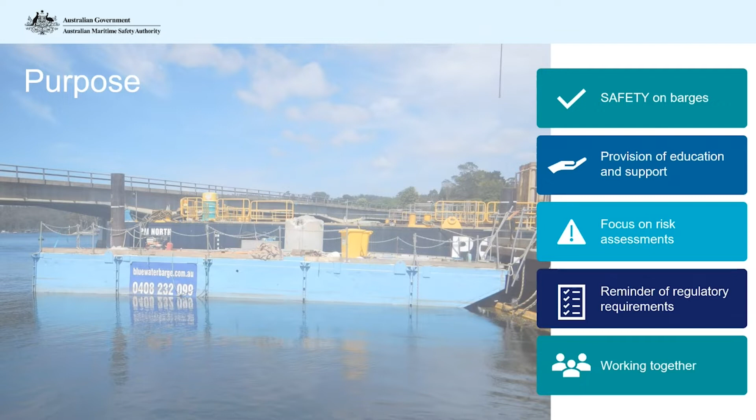AMSA has recorded this webinar after holding a number of successful workshops for construction barge owners and operators as part of a safety education campaign. This webinar aims to improve the safety of smaller construction barge operations. Today, we will educate you about your obligations regarding risk assessments with a focus on the risks associated with operating smaller construction barges. We will take a look at some of the key risks involved with construction barge operations and provide an overview of the regulatory requirements under the national law.

First of all, I would like to provide a brief overview of AMSA, the Australian Maritime Safety Authority. AMSA has a number of regulatory functions and responsibilities. AMSA is responsible for safe shipping in international and Australian waters. AMSA upholds the requirements of international conventions on foreign flagged ships and also conducts flag state inspections on the Australian flagged ships, known as regulated Australian vessels.

AMSA maintains a network of aids to navigation in Australian waters, such as many of the coastal lighthouses. AMSA provides a national search and rescue service utilising both maritime and aviation assets through the Joint Rescue Coordination Centre in Canberra, responsible for an area equivalent to 10% of the Earth's surface. AMSA is also responsible for pollution prevention in the marine environment. AMSA coordinates contingencies in the case of such an environmental emergency, including national stockpiles of oil spill response equipment, and has contracts and arrangements with towage assets in case of vessel breakdown.

And of course, AMSA administers the national law. Prior to the national law, each state and territory had legislation which regulated their commercial vessels. Whilst there was a national committee who developed national standards, these were not adopted consistently across the jurisdictions. This meant that if you wished to operate your barge in another state, you may have needed to get it resurveyed. Also, crew may not have had their certificates of competency recognised in other states.

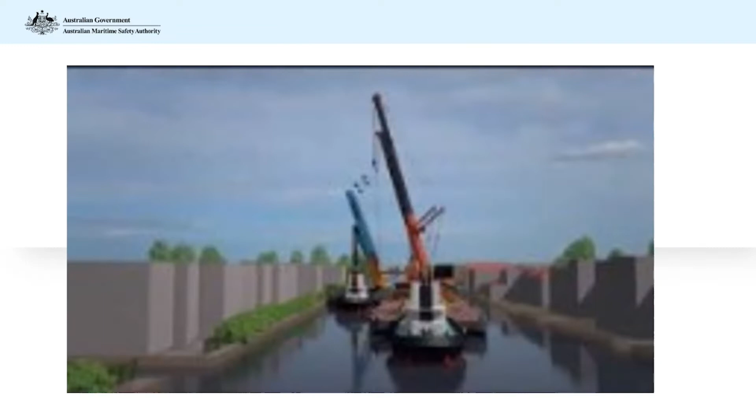Next, we would like to show you a short video which highlights some of the consequences of when things go wrong on construction barges. This is a larger construction barge operation, but the risks are very similar. It happened in the Netherlands in 2015, and I would like to thank Studio Alphen for permission to show this video.

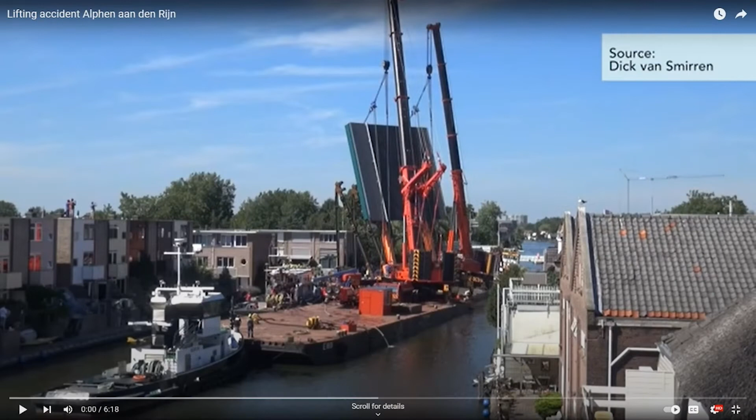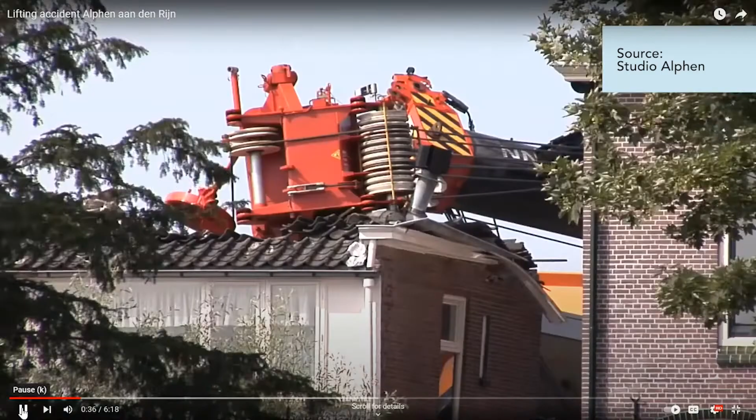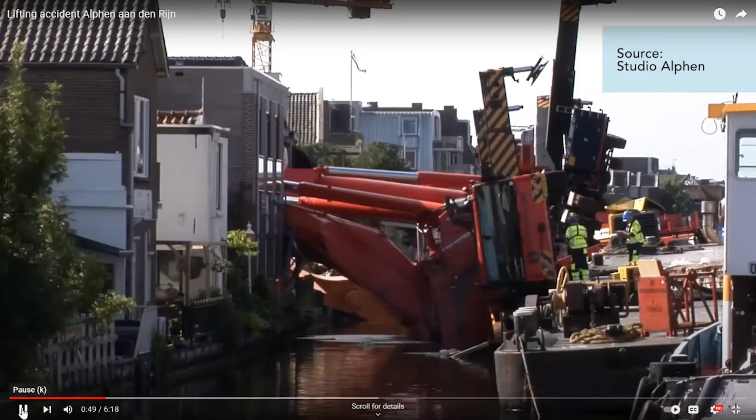On the 3rd of August 2015, a lifting rig of a section of the Queen Juliana Bridge in Alphen aan den Rijn capsized. Both cranes and the lifted bridge section fell on the surrounding buildings. Many were completely destroyed. Miraculously, no persons were injured. Why did the lifting rig collapse? How did the parties involved assess the risks of this complex operation? And how did they manage the safety risks for the surrounding area? The Dutch Safety Board started an investigation into these questions.

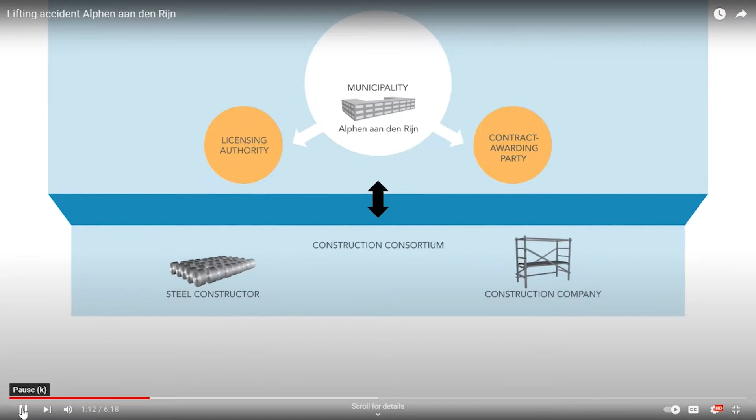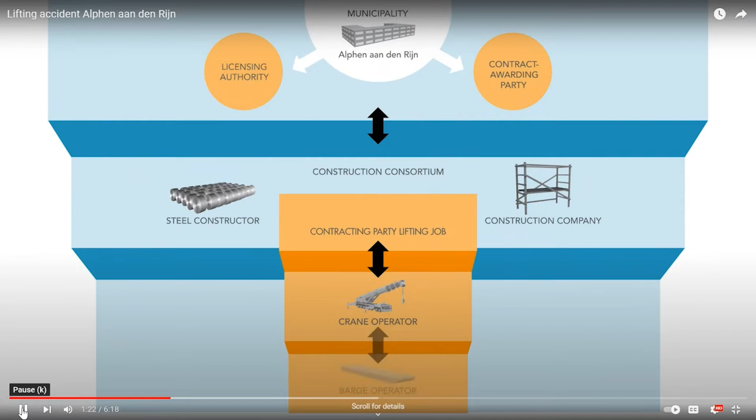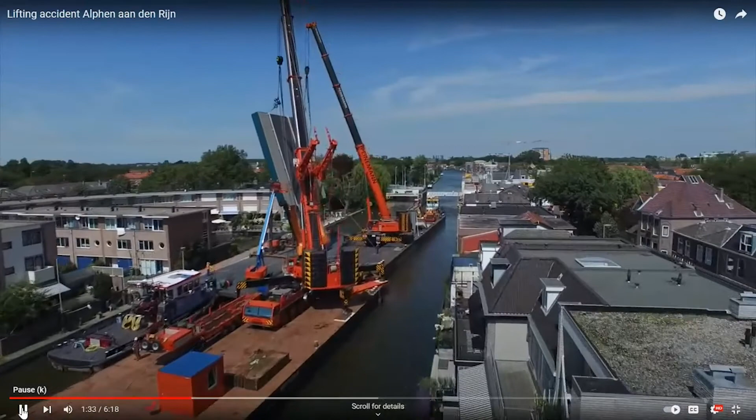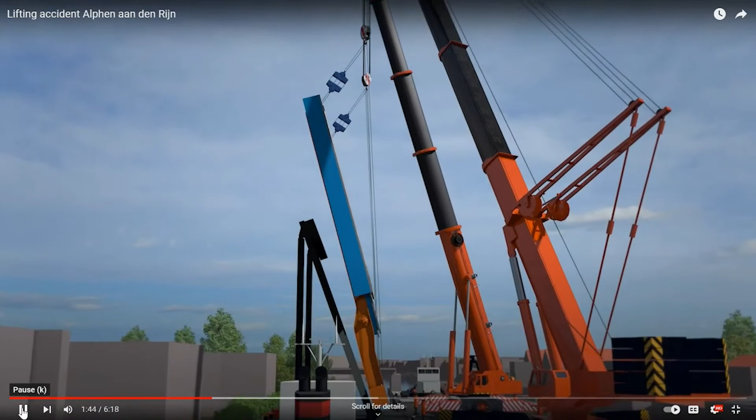The municipality of Alphen aan den Rijn commissioned the renovation of the bridge to a consortium of a steel constructor and a construction company. The steel constructor hired a crane operator to lift the bridge section. The crane operator subsequently hired the barge operator. A large mobile construction crane of 700 tons on the first barge and a small construction crane of 400 tons on a narrower barge were deployed for this lifting operation. The intention was to simultaneously lift the bridge section from a third barge in a tandem lift operation. The bridge section would then be maneuvered in between the two cranes before being tilted into an almost horizontal position. The two barges would then sail 100 meters, where the bridge section was to be raised and fitted into the existing bridge structure.

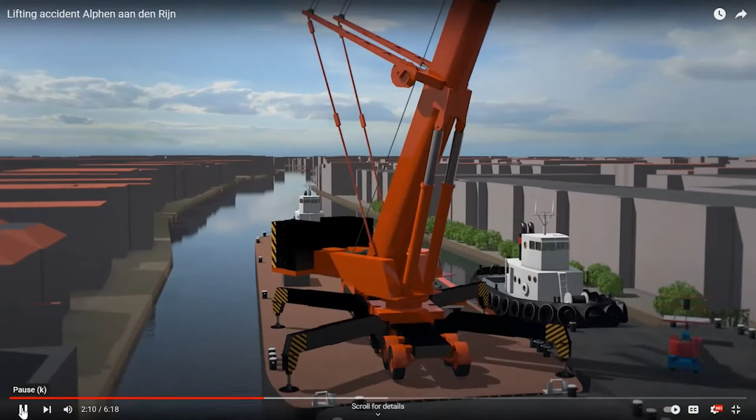The crane operator and barge operator had worked together before, and they believed in the feasibility of the plan, as long as the work was undertaken cautiously and if ballasting of the barges would be done in time.

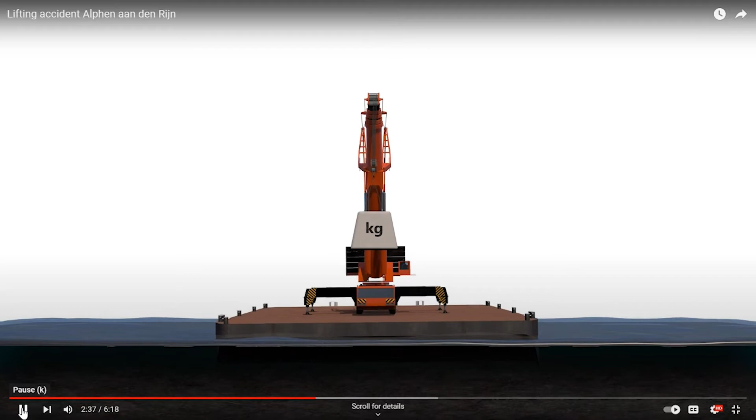Floating objects, such as barges, can move freely in water. The amount of movement depends on the stability of the rig. The more stability, the less movement, and the sooner it returns to its starting position. Stability is determined by the width and depth of the barge, and by the height of the center of gravity in the crane masts.

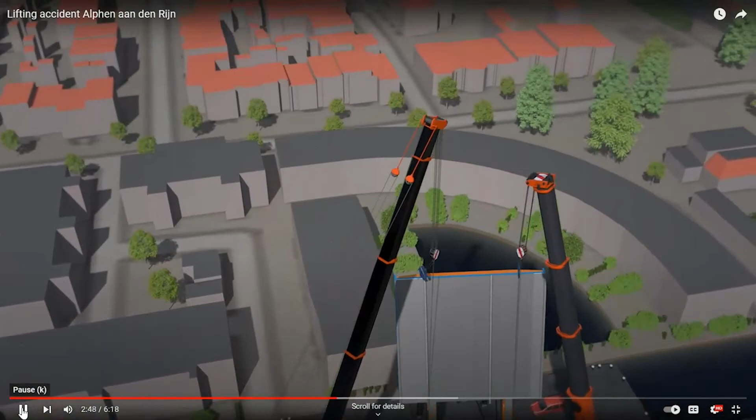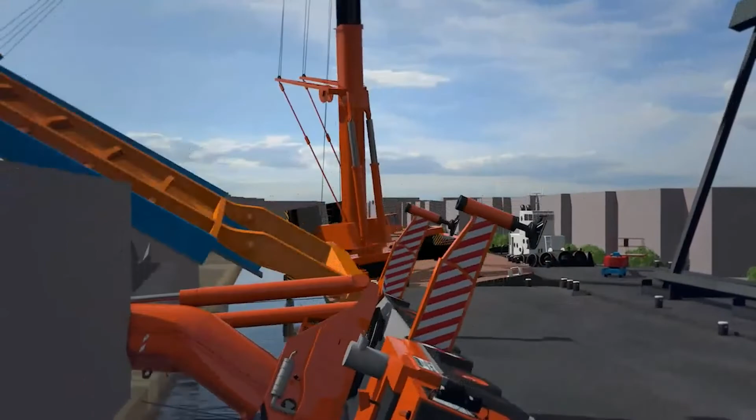The lifting rig as used on the 3rd of August, in particular the barge bearing the small construction crane, demonstrated insufficient stability and started to slope to such an extent that the mast of the crane failed, causing the crane itself to topple, thereby pulling the bridge section with it, which in turn also pulled over the large construction crane.

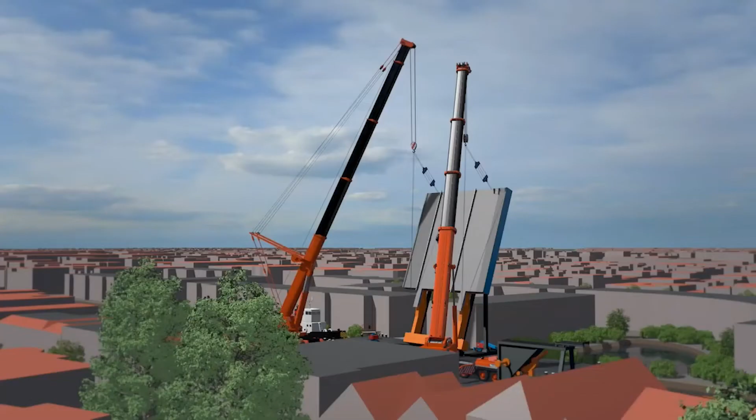The complexity of the lifting operation had been underestimated by the parties concerned. There was a lifting plan that failed on critical elements. The cranes were too high in relation to the width of the barges. In addition, several heavy objects were placed on deck, further reducing the stability.

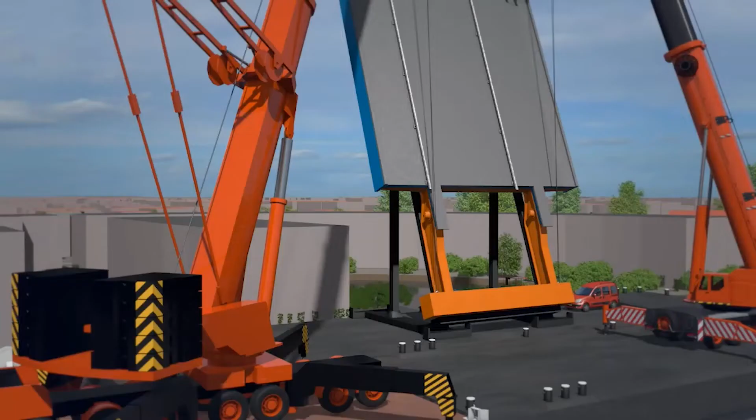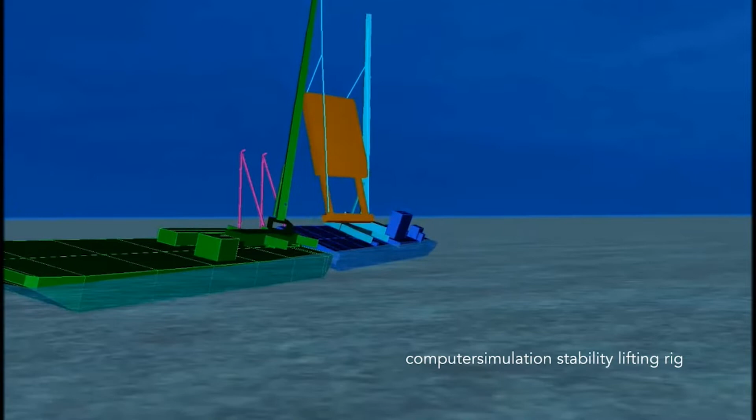There was no margin to absorb additional forces caused, for example, by natural bending of the mast of the crane, the movement of the cranes, or a gust of wind. A relatively small movement of the cranes caused the whole construction to topple. The Dutch Safety Board recalculated the initial stability and concludes that even if the lifting operation had been carried out faultlessly, the accident could not have been avoided.

The lifting rig was situated in the densely populated centre of Alphen aan den Rijn. The largest crane towered with 44 meters far above the surrounding buildings. None of the parties involved recognized that the lifting of the bridge section engendered risks for the immediate surroundings.

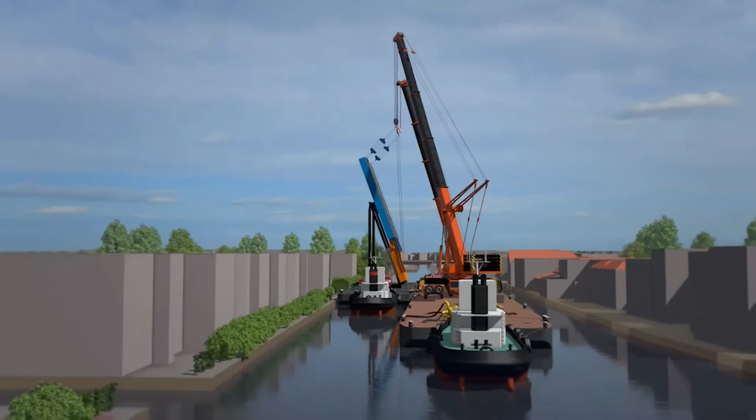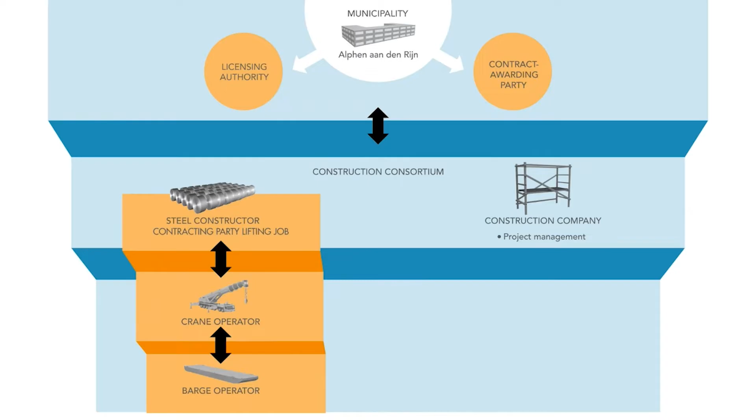Within the construction consortium, the construction company, as project manager, occupied a key role in coordinating risks. However, the construction company saw the hoisting of the bridge section as a responsibility of the steel constructor, and therefore not its own. Neither noticed that the lifting plan was inadequate, and they let the lifting start with an unsafe rig. Safety focused merely on the workers and the construction site itself.

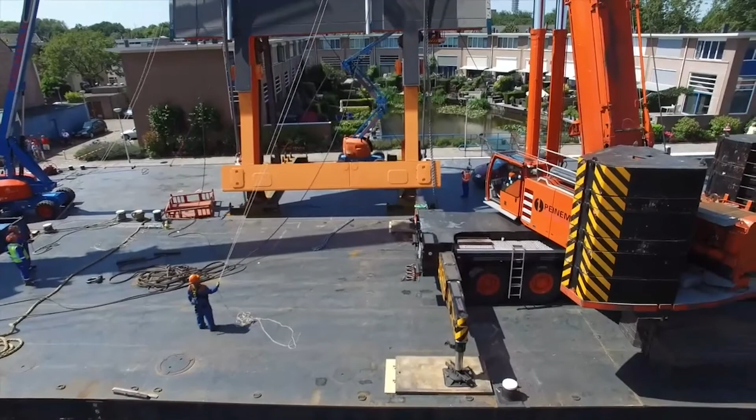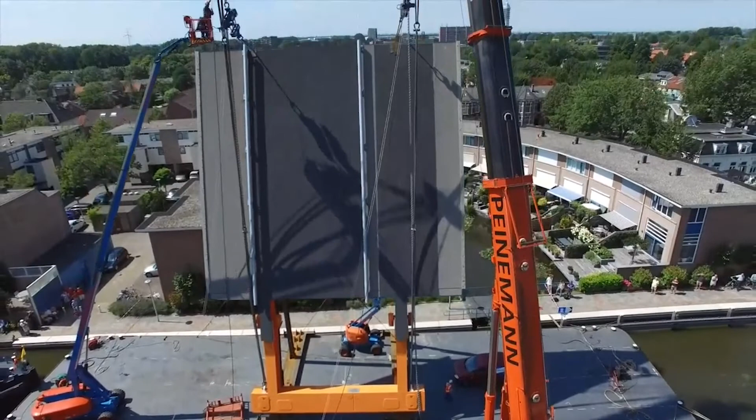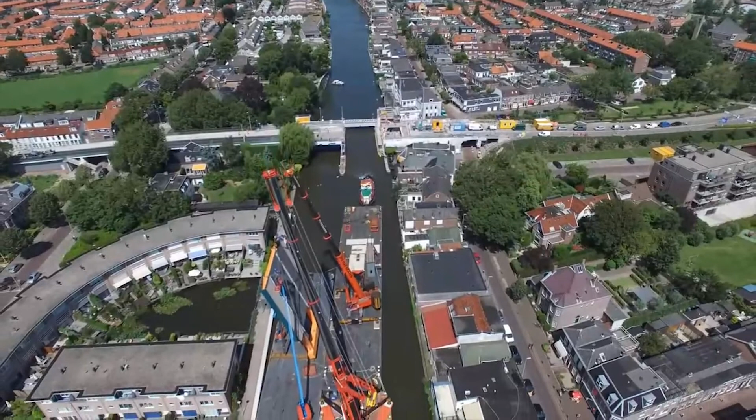The municipality of Alphen aan den Rijn attached considerable importance to avoiding additional nuisance for the local residents during the renovation work. When issuing the license for the renovation, the municipality could have demanded a construction safety plan for the area describing safety measures, but failed to do so. As a result, the execution of the work, including the lifting work and the related safety risks for the surrounding area, remained unconsidered.

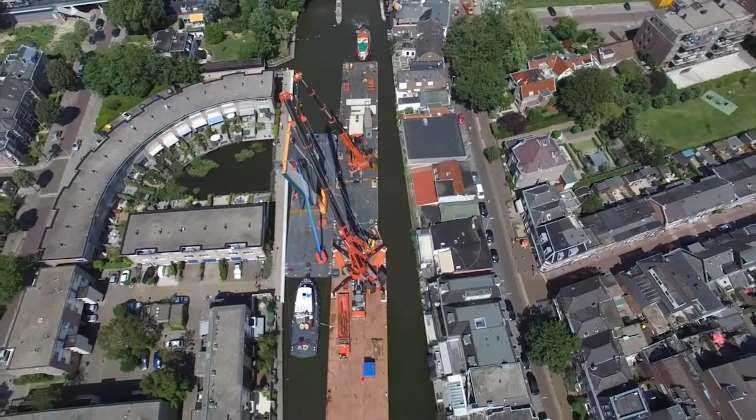The Dutch Safety Board concludes that various parties blindly trusted one another's expertise and relied on the responsibility of the other parties in the chain. This pattern was reflected throughout the project organisation, from barge operator through to municipal authority.

The Dutch Safety Board has the following recommendations. To the construction companies involved, for future building projects, ensure that adequate risk management is performed for the entire construction process. To the Minister for Housing and the central government sector, ensure that any building project is designated one party responsible for risk management. Enlist in the building decree when a construction safety plan is needed.

I'm sure you will agree that it was amazing that no one was injured in that incident. It was also amazing that no stability analysis had been undertaken during the planning of that operation. And then, even if a stability analysis had been done, it would have shown that this incident was inevitable, even if everything went to plan.

Another key takeaway is that there were too many people involved and all trusting each other's expertise without anyone taking overall control and management to assess the risks. This safety campaign was included in the 2021-2022 National Compliance Plan published by AMSA on our website.

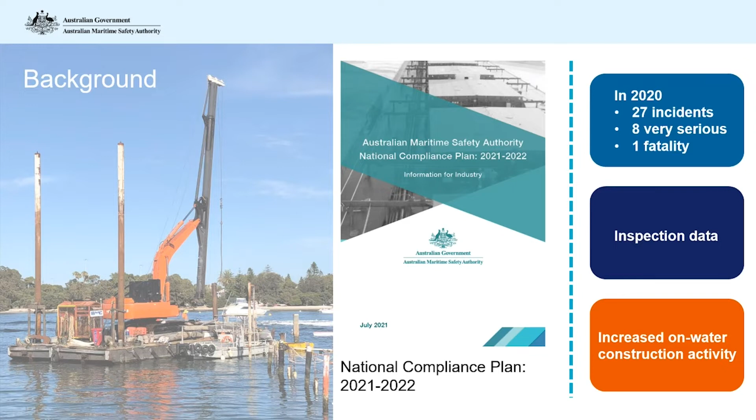AMSA has been seeing an increase in incidents involving construction barges, and our investigations show that lack of up-to-date risk assessments and poor implementation of risk assessments has been a contributing factor. There have been 2 deaths involving construction barges over the last couple of years. We are also seeing poor risk management practices as common deficiencies in our inspections. This slide shows the common issues AMSA has observed through incident investigations and inspections.

Next, I will touch on AMSA's regulatory requirements for construction barges. All domestic commercial vessels are required to hold a vessel certification. This may be either a certificate of survey or non-survey vessel permission. This certification is evidence that the barge meets design and construction requirements and determines the type and quantity of safety, navigation, anchoring, communication and fire equipment carried on board.

If your barge holds a national law certificate of survey, it may be operating under General Exemption 41, which exempts unpowered barges from certain construction equipment and crewing requirements where it may not be practicable to comply. These exemptions depend on factors such as whether there are persons and/or machinery on board the barge.

The standards your barge needs to meet also depend on whether it is an existing vessel, which means it was legally permitted to operate when the national law came into force in July 2013, or whether it is a new vessel under the national law.

If your vessel is an existing vessel and you make certain changes, such as operate in another state or add a crane, the national law will consider it to have triggered to become what we refer to as a transitional vessel. The barge will need a new certificate of survey and be required to meet more of the current safety standards.

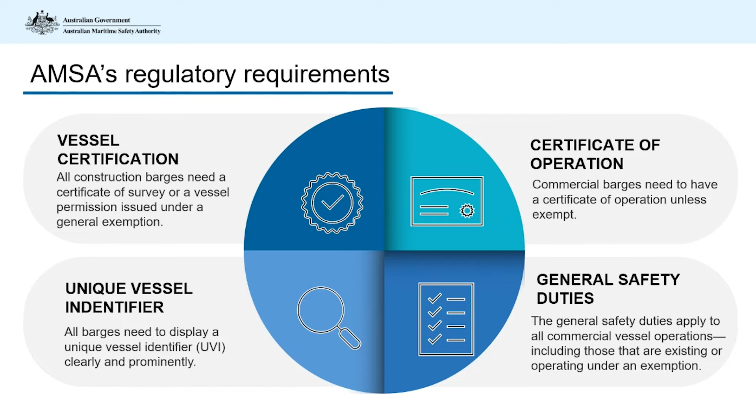Construction barges are classified as domestic commercial vessels and must meet the requirements of the national law administered by AMSA, as well as the requirements of other regulators. These may include the requirements of local waterways management authorities, environmental protection agencies, and state and territory workplace health and safety regulators. Under workplace health and safety legislation, construction barges are defined as workplaces and must also meet specific workplace health and safety requirements with regard to risk assessments to operate safely.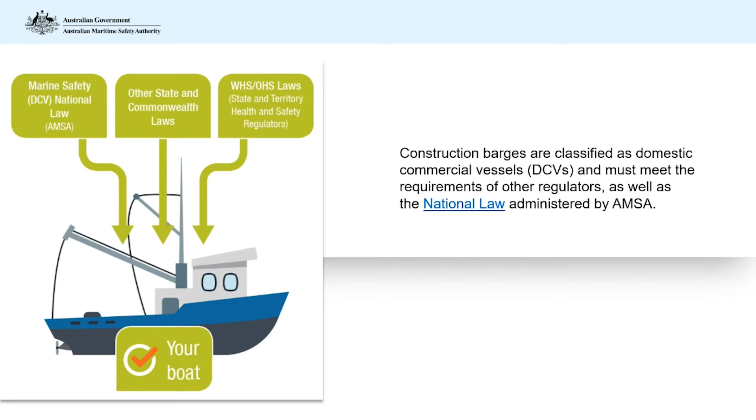Generally, local waterways management authorities will apply requirements relating to rules of the road, including collision regulations. They may apply certain restrictions to ensure safe navigation, particularly in heavily congested areas and those waterways with hazards to navigation. You need to be aware of all of your environmental protection obligations and consider them when completing or reviewing your risk assessment. Your local environmental protection authority can provide more information.

You need to be aware of the workplace health and safety requirements in the state or territory where you are operating. These requirements can include the requirements for high-risk work licences, such as for crane operations, what types of incidents you need to report to the workplace health and safety regulator, the timeframes for reporting, and the requirements to preserve incident sites, plant registration and inspection requirements, requirements for safe work method statements, and requirements for workplace health and safety management plans.

Whilst workplace health and safety legislation is risk-based, some high-risk work activities are specifically regulated by workplace health and safety regulations and codes of practice. These can include falls from height, access and egress, mobile plant, emergency procedures, and trip hazards.

AMSA has a memorandum of understanding with most of the workplace health and safety regulators to work together on both education and compliance and incident investigation, as we recognise that there are similarities and overlap between the regulatory requirements from both AMSA and WorkSafe authorities for domestic commercial vessels.

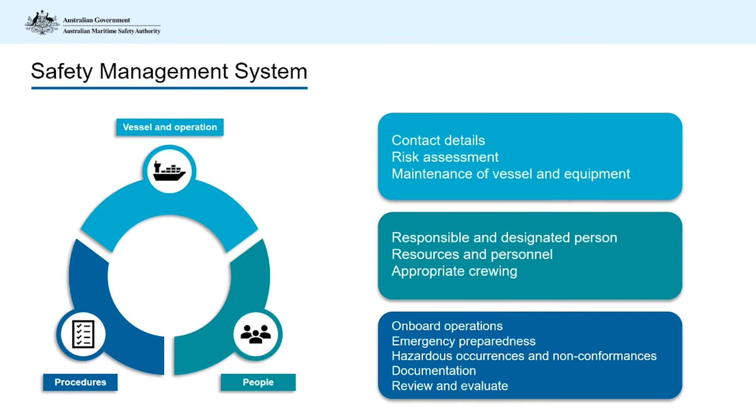The benefits of a safety management system include an increased awareness of safety, and everyone on board the barge understands the risks involved and how they can keep themselves and others safe. It also ensures everyone knows what to do in the event of an emergency. An SMS also provides evidence that if an incident does occur, you did everything you reasonably could to protect those involved. It can lower your exposure to costly and stressful legal action.

There are many negative impacts as a result of incidents, including injuries and fatalities, and the impacts to family and co-workers. Compliance action can include fines or prohibition of vessels operating. You can be exposed to civil litigation and the loss of income and assets, and it can also impact your business reputation. If someone is injured on your barge, will others want to come and work with you?

Construction barge operations present a variety of hazards and risks to safety which must be identified with controls put in place to eliminate or minimise these risks so far as reasonably practicable through a risk assessment, which is part of your safety management system. This will help everyone on board understand their safety responsibilities. The risk assessment is the cornerstone of the SMS. It determines the procedures and training that you implement. This webinar is not designed to teach you how to do a risk assessment, but we will provide advice on AMSA's requirements and expectations.

This slide provides an overview of the risk management process. AMSA has published Risk Assessment in the National System: A Practical Guide on its website, which outlines AMSA's expectations with regard to risk assessment. It follows the Australian standard for risk assessment. Construction barges undertake high-risk construction work under workplace health and safety regulations and are required to prepare a safe work method statement, or SWMS. Your SWMS may also meet the AMSA risk assessment requirements if it identifies and assesses the risks associated with the key daily tasks of the construction barge.

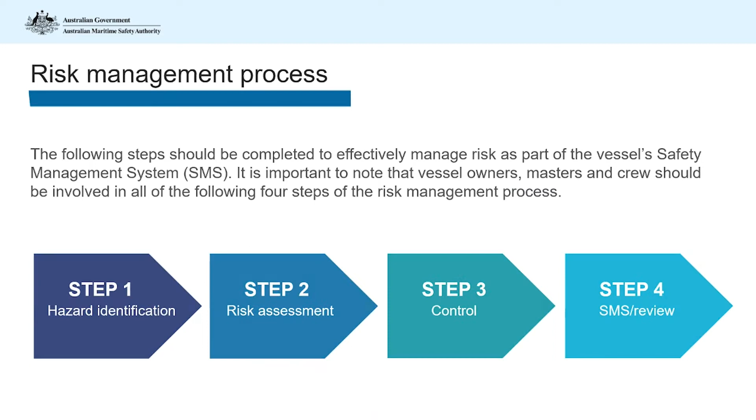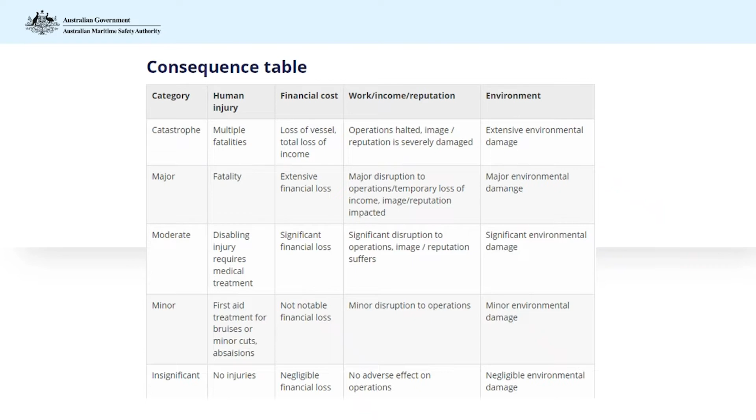As part of your risk assessment, you should assess the likelihood of the risk occurring. That is, the possibility that someone will come into contact with the hazard. You should then assess the consequences if the risk did eventuate. This includes the type and/or severity of harm that a person could sustain if they came into contact with the hazard. You can then use the risk assessment matrix to give the risk a rating. Once suitable risk controls are applied, it is useful to reassess the risk to see if the risk rating has changed. In many cases, the likelihood of a risk occurring will reduce when effective risk controls are in place.

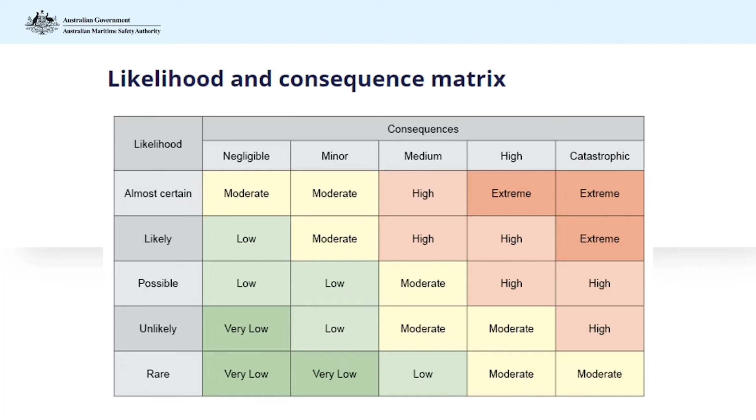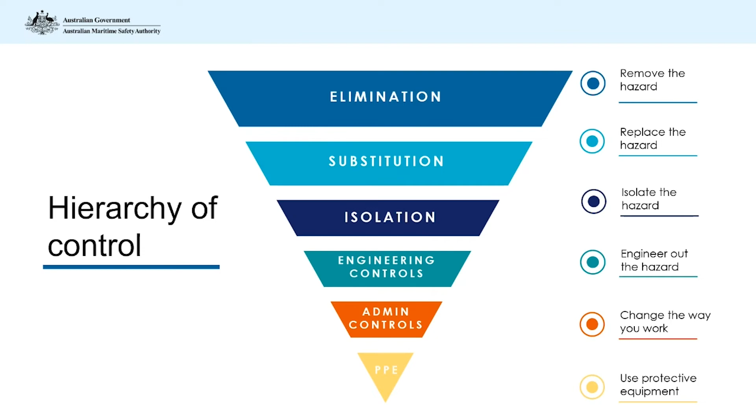When completing your risk assessment, you should consider the hierarchy of controls, which is also referred to in workplace health and safety regulations. You should start at the top of the triangle with the most effective controls and then work your way down to the bottom. In most cases, personal protective equipment is the least effective as it will not prevent a risk eventuating. For instance, wearing a life jacket won't stop a person falling in the water, but it will improve the probability of the person not drowning. The engineering control of having appropriate guardrails is more likely to prevent a person from falling overboard. You can't eliminate all risks, humans are not fail-safe, and accidents will happen, but you can control risks to reduce the likelihood and consequences of incidents.

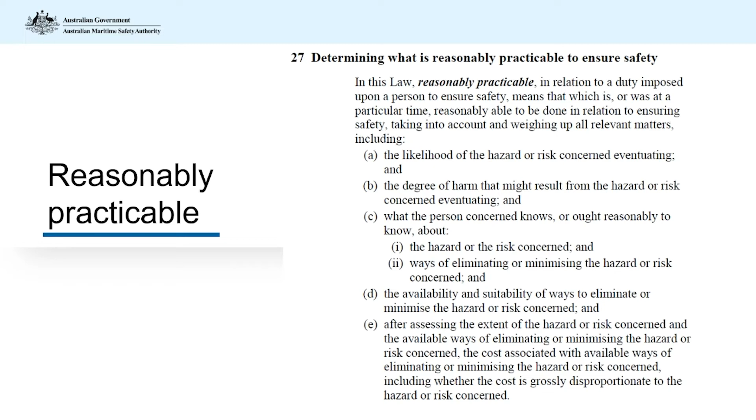The legal test in both the national law and workplace health and safety regulations is the requirement to reduce your risks so far as reasonably practicable. There are guidelines published on the Safe Work Australia website with further information on how to determine what is reasonably practicable.

It is most important that your risk assessment reflects what you are actually doing. Construction barges typically undertake a variety of operations which may include carrying and securing heavy deck loads, lifting heavy weights, powered mobile plant, or working at height. Your risk assessment must be reviewed every time anything on your vessel changes, whether that be a new location or a different work task. You must also review your risk assessment after any incident or hazardous occurrence and keep a record of your updates. Like your business operation, your risk assessment needs to be dynamic and respond to change.

You can supplement your risk register with other risk assessment processes, such as a job safety analysis or the Take 5 process. These are particularly useful if something unexpected happens. Before immediately jumping in to fix an issue, undertake a risk assessment process to ensure people aren't going to be placed in danger. This is often when incidents occur. Make sure you keep a record of these risk assessments. Now we are going to have a closer look at some of the factors that can create high-risk situations on construction barges.

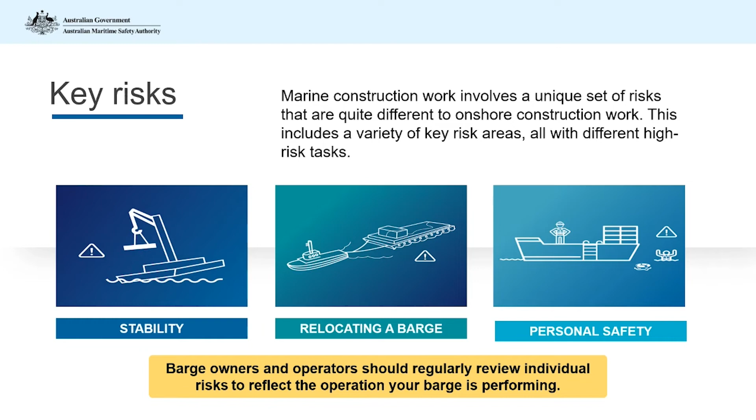AMSA considers stability to be a high risk and so needs to be addressed in the risk assessment for a construction barge. Basically, stability refers to the vessel's ability to return to its upright position after being heeled over by wind, waves, or other forces such as lifting loads or adding cargo. The flat bottom shape of barges means they have unique stability characteristics which need to be considered when carrying loads and lifting weights. And AMSA has been observing poor practice in relation to managing stability on construction barges, and this has resulted in incidents. We'll take a look at some of the important factors affecting stability on construction barges.

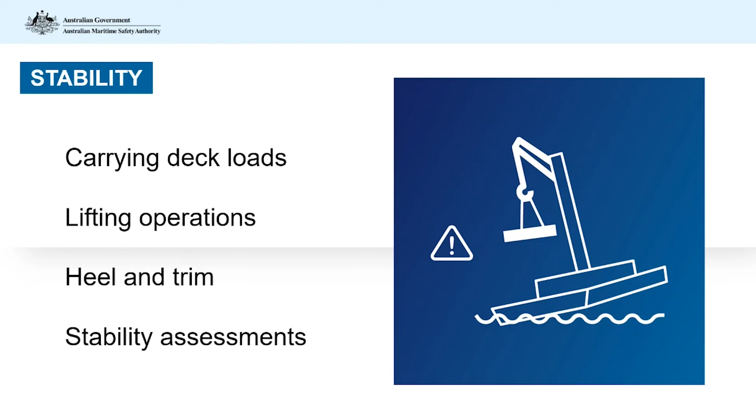Construction barges may carry a variety of deck cargoes, such as building materials, wharfing piles, wheeled or tracked vehicles, and contained liquid cargo. The main risks associated with deck loads include the risks to the integrity of the deck and the barge itself, and also the effect on stability or reserve buoyancy of the vessel. You need to consider the internal structure of the barge and thickness and condition of the deck plating. As part of this, consider the concentration of any loads on the deck. Consider using dunnage to spread any concentrated loads across a wider deck area. Make sure you regularly inspect the deck plating and barge structure and monitor for any corrosion which may weaken the structure.

Basically, the less barge there is above the water, the closer it is to sinking and the greater risk to the safety of the cargo and people on board. The distance from the water's surface to the deck is known as freeboard. The use of minimum freeboard marks is a really good idea and gives an easy visual reference to make sure the barge is not overloaded and has enough reserve buoyancy. You also need to ensure you appropriately secure your deck load to prevent it shifting, for instance, due to waves, wake from other vessels, or changes to the heel and trim of the barge during lifting operations. The movement of unsecured deck loads can cause a barge to rapidly capsize.

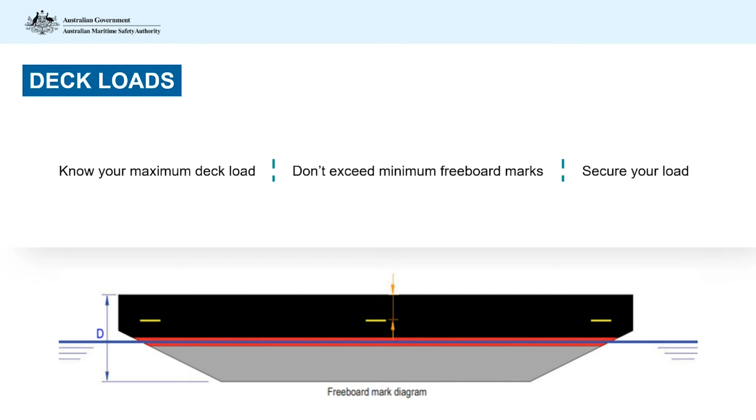Construction barges may have a fixed crane or carry a mobile crane or excavator. This may be used to lift deck loads on and off the barge or move objects outside the barge. Loss of stability is one of the key factors associated with serious crane incidents. Using cranes or lifting devices on a barge presents higher risks than land-based operations, which must be considered and assessed as part of your risk assessment. One of the most important issues to note is that you cannot use the same loading graphs and calculations and radius diagrams for mobile cranes once you have placed them on a barge. These need to be reassessed by a competent person, such as a naval architect, and derated to ensure safe operations.

When a weight is lifted by a crane, the effect of the centre of gravity of the lifted item rises to the point of the lift on the crane, as shown in this diagram. This can dramatically raise the centre of gravity of the barge and the crane. This will lower the stability of the barge, similar to the effect of standing up in a canoe compared to sitting down. You want to keep the centre of gravity as low as possible.

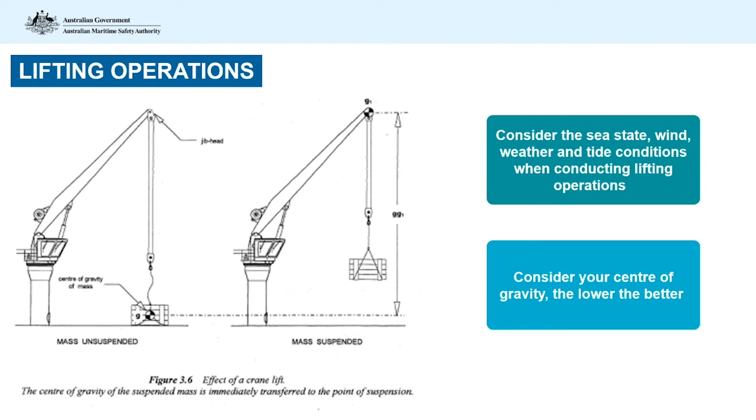Deck loads should be loaded to ensure the heel and trim is even. Excessive heel or trim reduces the area of the barge in the waterplane area, and it can quickly become unstable and capsize. It may also cause the downflooding of water into spaces below the deck. Things that affect the heel and trim include lifting operations and the loading and unloading of tracked or wheeled vehicles. If your barge is not sitting evenly in the water, then your maximum lifting and reach limit will be reduced.

You must closely monitor the distribution of weight during loading operations. Bilges must be checked regularly and kept dry, as the flat bottom of a barge can create a significant free surface effect. A free surface, also known as a slack tank, is a body of water in a tank or a vessel that can slosh about. The presence of water in the bilges will invalidate a stability assessment.

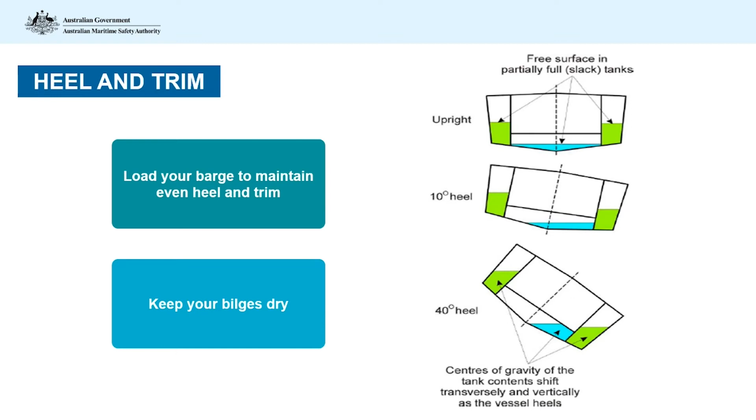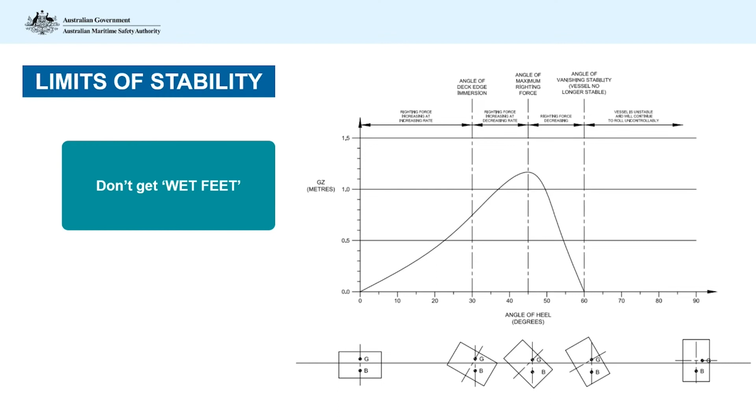This diagram depicts what will start to happen when a barge is approaching the limits of its stability. Getting wet feet is a sure sign that the barge is running out of stability and close to potential capsize, as it relates to deck edge immersion. A barge is stable until it's not. You can see here the curve drops off quite sharply. When the chine of the barge comes out of the water, you lose stability very quickly after that, as the diagram shows.

Key to managing the risks relating to stability is having a relevant stability assessment from an accredited marine surveyor. It is a requirement for all construction barges approved to operate after June 2013, including non-survey barges, which have a crane, deck load or lifting device installed, and this includes a mobile crane. Having an up-to-date stability assessment ensures you will not generate a heeling moment that may endanger or capsize the barge or exceed the maximum safe loading for the barge. This stability assessment will ensure you are using the right size barge for your crane reach and slewing impacts.

Your stability assessment may include useful guidance such as the limiting KG curve. The term KG refers to the distance from the vessel's keel to its centre of gravity, and it displays a line indicating the maximum height of the vessel's vertical centre of gravity for a given displacement. This can be further simplified for barges to display in terms of cargo mass and height above the deck. If the location of the centre of gravity for a given mass is below the curve, then this is a safe condition. A centre of gravity and mass above the curve is unsafe.

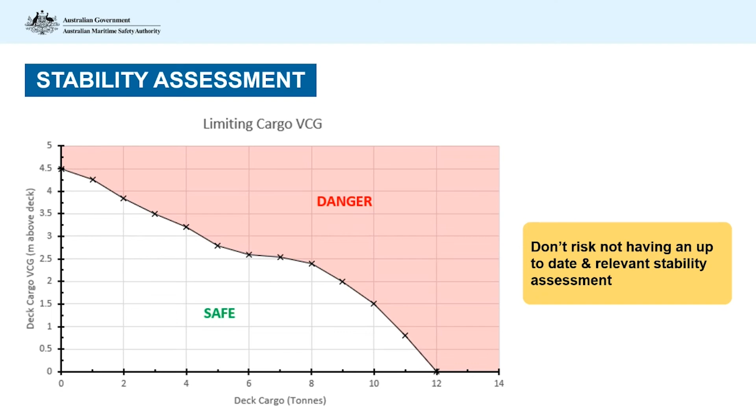Relocating a barge. Construction barges regularly relocate to different job sites by being pushed or towed by another vessel. Often heavy barges can be difficult to manoeuvre and susceptible to wind, current and tides. Relocating them creates a new set of risks that must be considered and controlled as part of your risk assessment. The towing vessel is a domestic commercial vessel itself and needs to meet the relevant national law requirements. It needs to be a suitable vessel in terms of engine power for the weight of the tow, have adequate stability, and its crew need to hold the relevant certificates of competency. There needs to be unrestricted visibility for the master and a method of communication with the crew.

You need to consider the suitability of the tow arrangements themselves, including the suitability of tow points on the barge and the towing vessel, and the condition of tow ropes, bridles and wires. Also ensure you are displaying the correct day shapes or navigation lights. The crew involved need to have appropriate experience and training in towing operations and consideration given to the dangers of working near lines under tension.

A passage plan should be developed which considers weather and sea conditions, navigational hazards, local waterways and port requirements, safe havens, fuel requirements, communications coverage, and emergency plans, including the ability to release the tow under load. Ensure the barge you are relocating is watertight. Keep hatches closed and bilges dry. Minimise the load and polluting substances you need to carry and make sure any load is secured. If relocating a barge outside its area of operation on its vessel permission, you will need to apply for a temporary operations permit and address these considerations.

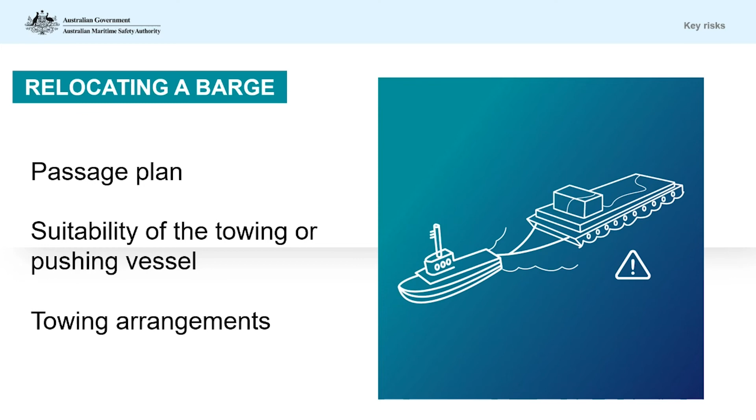You need to provide safe access and egress to your construction barge, whether this be from a wharf, marina, or another vessel. A gangway may be needed to prevent workers and crew from falling overboard. Any gangway or gangplank used needs to be appropriately secured and take into account tidal variations. Failure to provide a safe means of access has previously resulted in drownings.

Consider the requirements for emergency evacuation in case of fire, explosion, sinking, or loss of stability. If this cannot be via the shore, then a standby vessel that can carry everyone on board may be needed. If you do not have compliant guardrails, consider other controls to minimise the risk of persons going overboard, such as the marking of deck edges, no-go zones, and the wearing of life jackets, which are mandatory in some cases.

You need to have a person overboard plan and practice your drill. Consider whether you need a means of reboarding the barge, such as a ladder, and whether you have a rescue vessel standing by, particularly if there is current or tide, as time can be critical. Can you communicate with other vessels in the area, and do you have a life buoy at the ready to deploy?

Key to managing risks on board construction barges is ensuring everyone understands the hazards and risks on board. You may have workers on board that are unfamiliar with the risks of working on the water. Marine Order 504 states that all persons on board a vessel need to understand the risks and how to safely carry out their assigned duties and respond rapidly and effectively in the event of an emergency.

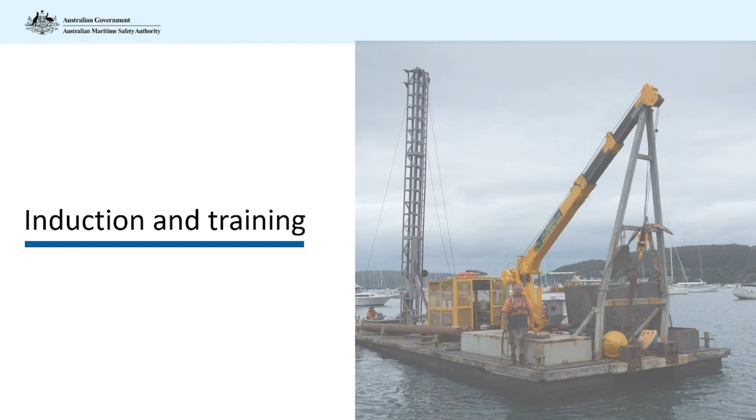By reporting marine incidents, you are not only meeting your legal obligations, but it assists with the development of more effective safety education and advice to avoid similar events in the future. You will need to submit a Form 19 to AMSA. This can be done through an online form or email a copy through to AMSA. One of the most important parts on this form is the part which asks you what actions you are taking to prevent a reoccurrence of this incident.

The information provided assures AMSA that the owner, operator and master understand the safety issues that contributed to the incident and have implemented measures to learn and prevent reoccurrence. If it is a serious incident, you will need to first submit a notification to AMSA of the incident as soon as possible, and this can be done using the Form 18 on the AMSA website. The detailed follow-up report of the incident must be submitted within 72 hours through the Form 19.

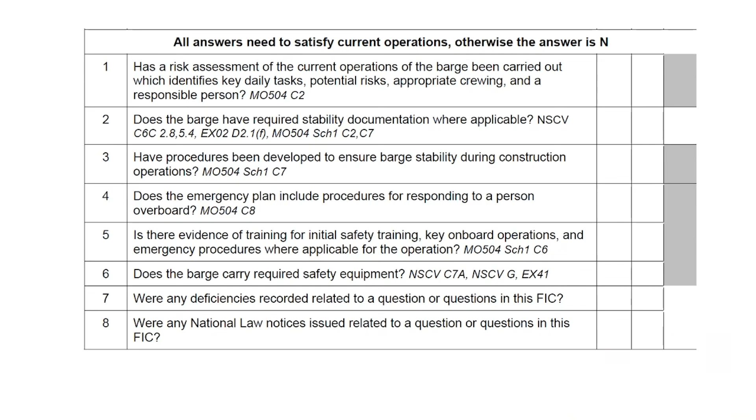Further information regarding this campaign and the material covered in this webinar are available on the campaign website. Resources that have been developed include an example risk assessment, a risk assessment safety checklist, and a range of frequently asked questions. You can also order a BARGE safety sticker. Please also visit the AMSA website for a range of information on operating domestic commercial vessels, and call or email AMSA Connect with any queries.